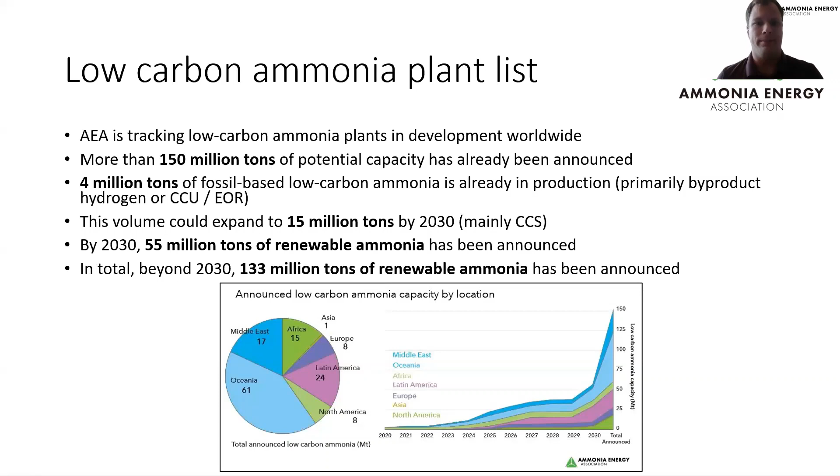Okay, well, thank you very much, Kevin. This presentation already looks quite interesting if you look at all the projects of green ammonia coming, and I think we're kind of proud that Fertiberia is one of the first companies that actually produce and plan to produce green ammonia in Puertollano.

I think Fertiberia is not the biggest company, but we are a reasonable sized company with 1,500, 1,600 employees working on the fertilizer business. And what's more important in this case, we have more than 40 years of experience in producing ammonia on the site. You see a lot of announcements of green ammonia projects, but it does help if you know what ammonia is about and how to make ammonia, and how ammonia is different than many other chemicals. Next slide.

We use ammonia to produce fertilizers, and fertilizers are an important factor in greenhouse gas emissions. We said we want to reduce it, and we're going to do it. That's the main reason Puertollano is the first site — together with Iberdrola, we managed in a short term to achieve full-scale production of green ammonia and green hydrogen, an important step in learning how to make green fertilizers work, including certification. If you're first, you have to develop all the new rules, and it's an important step toward fully decarbonized production.

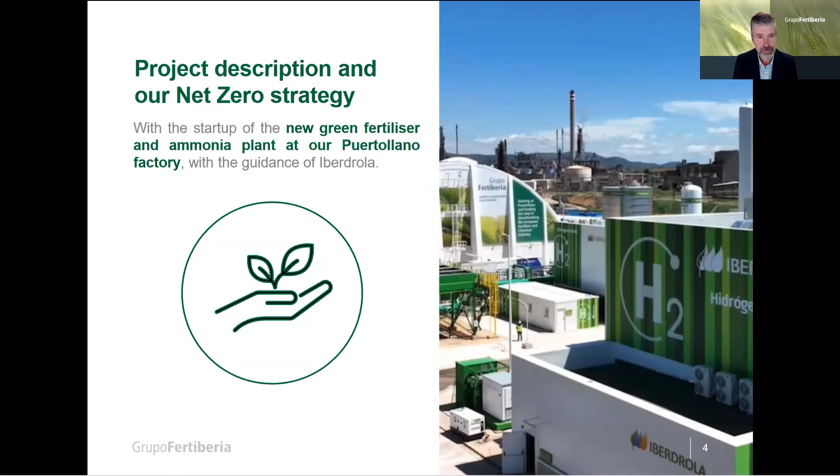The plant in Puertollano is what we call our kilometer zero plant. It's not about the future, not a project that's coming — it's actually running and producing hydrogen at the right place. It's connected to a solar field producing renewable power, and we're running a lot of tests now to produce hydrogen and feed it into our ammonia plant, a few hundred meters south. Iberdrola is our partner producing this hydrogen and who has installed the renewable assets.

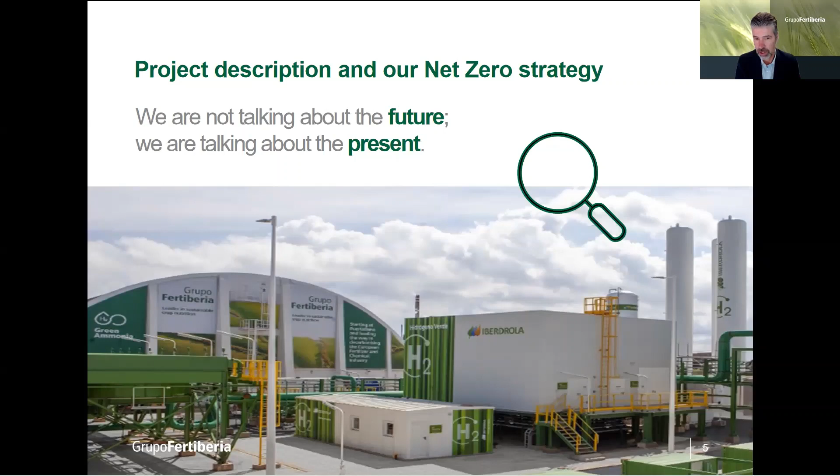This is the moment we can switch to a film we've built on site, which is a nice representation of how it actually looks and how it's being built up.

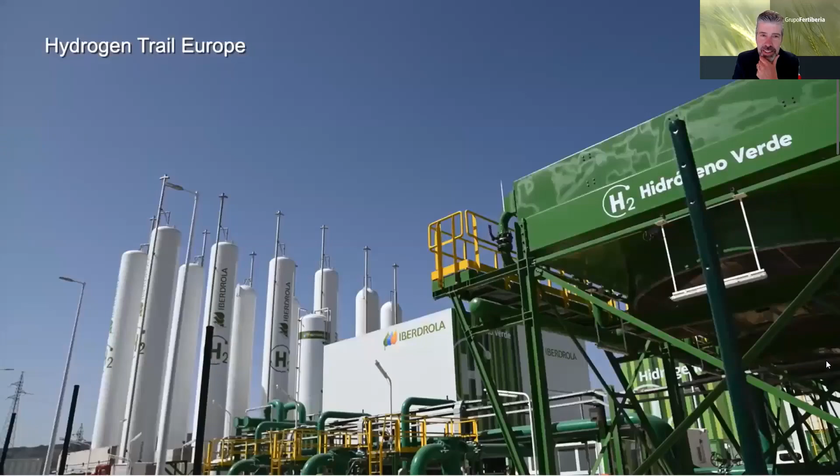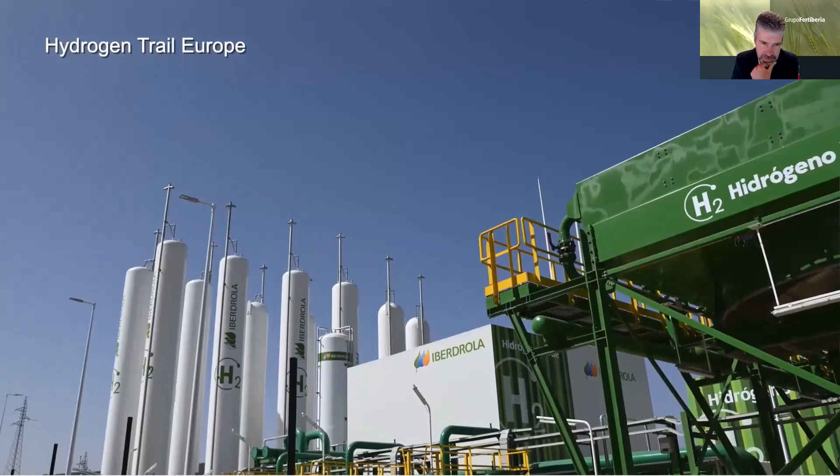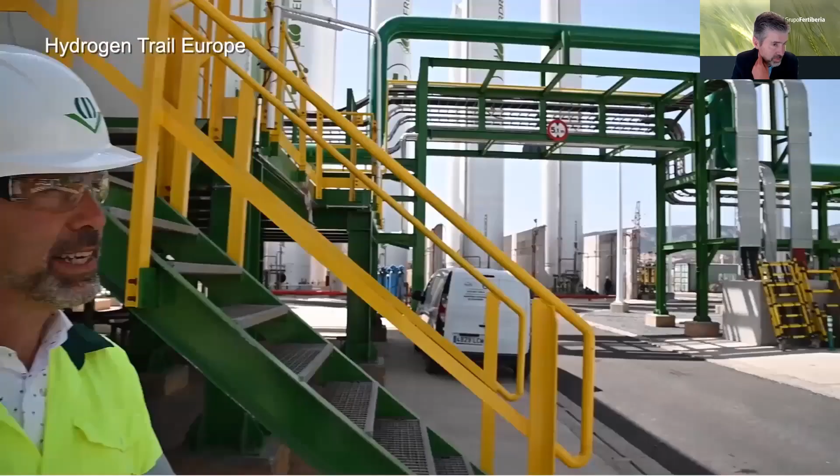We're here at the Puertollano site of Fertiberia, the first green ammonia production based on green hydrogen produced by Iberdrola on this site. What you see here is everything needed for a 20 megawatt hydrogen production. It starts with power coming in from the solar field, 8 kilometers away, feeding via cable to the rectifiers on the other side, then the power goes inside the electrolyzer building, where there are 16 units of 1.25 megawatt PEM electrolyzers.

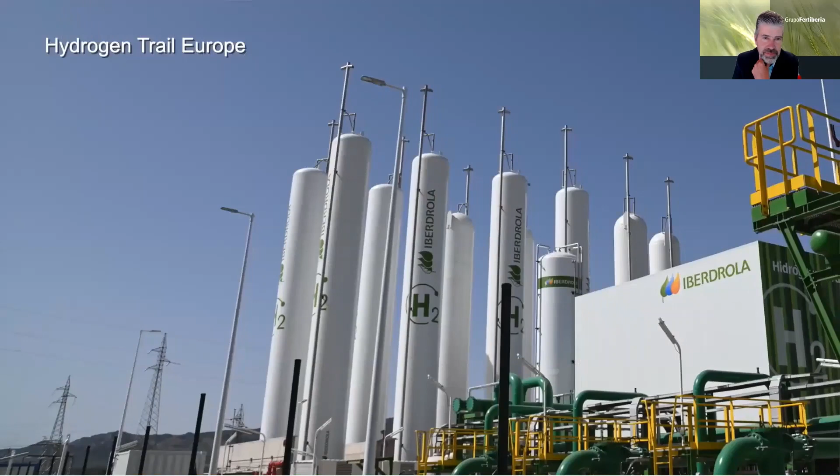Together they're 20 megawatts. This hydrogen goes via a compressor into the storage area, which contains 11 cigars that hold the hydrogen. We need quite some storage because we operate this hydrogen with an ammonia plant currently also run on natural gas — we combine both because we need a constant flow of hydrogen into the plant. Since the power comes from a solar plant, it's going to be dark at night, so we need a buffer storage, and this is quite an extensive storage to cover us through the night.

So of course 20 megawatts is a beginning, and we learn a lot from doing it here. For that you need constant hydrogen use, so you can only do that at a site where you already produce ammonia, and then you have two choices. We have good cooperation with Iberdrola at both sites where we produce ammonia — this is Puertollano, and Palos is the other in Spain. We started here because this gave the best principles, and also the solar field here was the earliest available.

At the moment we are standing next to the biggest green hydrogen electrolyzer in Europe — and it's also the first green ammonia production and green fertilizer production in the world. You think that's the future?

Yes, it's definitely green ammonia is the future. I think looking into the future, you will have dedicated green ammonia factories. This is a hybrid factory.

Next. So our company is a company of Norway. We have our headquarters in Oslo, and we are a leading hydrogen technology company specialized in two business units: electrolyzers, water electrolyzers, and hydrogen fuel stations.

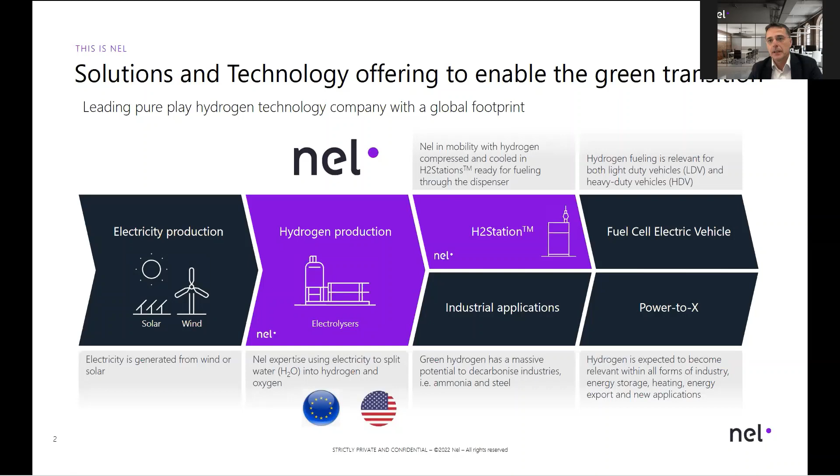We have two technologies, and in fact in our group we have two main factories. One factory in Norway for the alkaline electrolyzer technology, and also another important factory we have in the United States related to the PEM technology, proton exchange membrane technology of electrolyzers. In both technologies we are growing in production capacity, but also in new developments and new improvements in the designs and installations.

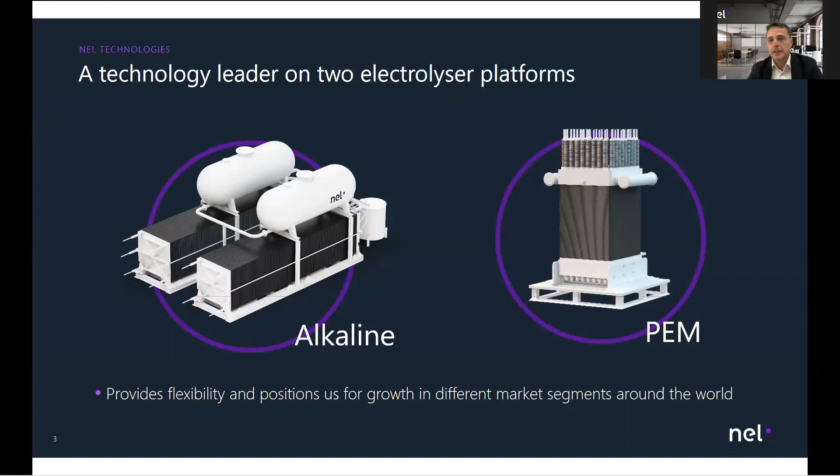Our company is special because in the same group we have the two main technologies of electrolyzers, and also we work in different ranges of production, from small electrolyzer systems for testing and industrial use, medium size that could go up to 20 megawatts, and also bigger, large scale size up to 100 and even hundreds of megawatts. The renewable market is moving in that direction, towards larger scales, taking advantage of the renewable feed. In our case, we are also being prepared to attend larger and larger projects. But having said that, we also maintain our product portfolio in all the different sizes of projects.

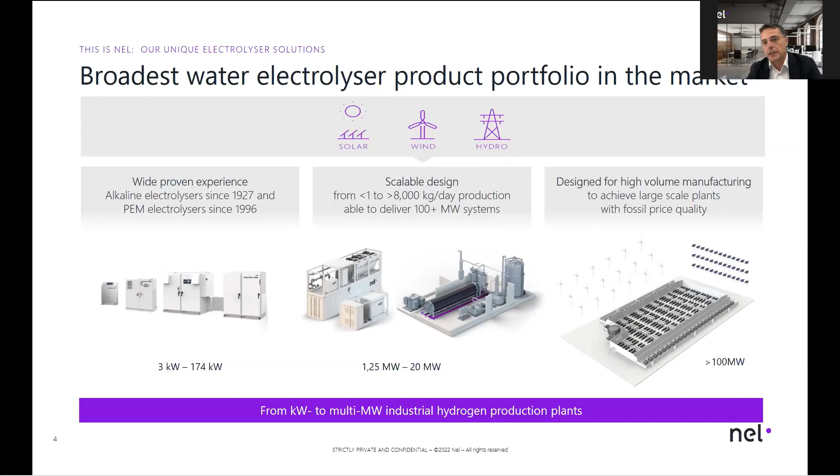I will explain in the next one how we look to the market, and also what applications and opportunities we see in this new green hydrogen market.

In fact, our company is a company that was established 90 years ago in Norway. So we joke that we are an old startup company, because in fact our company is old, but we are like a startup in a new phase because of how mature renewable energy is becoming, and how industrial applications and different sectors can be decarbonized. This is what is happening.

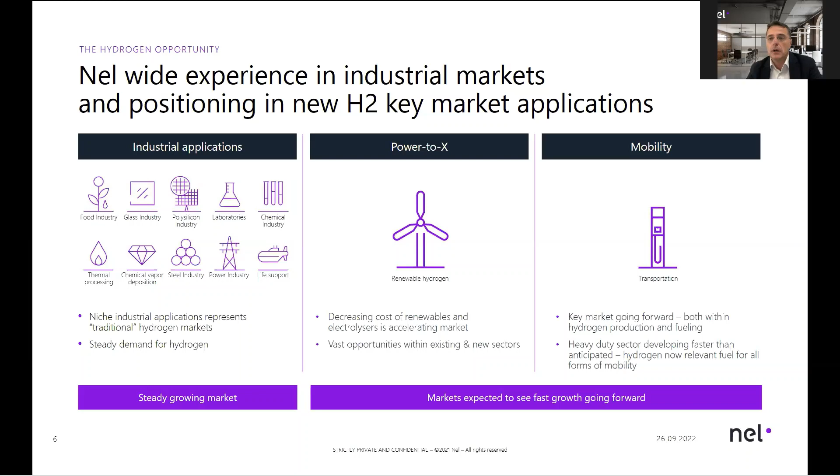We know the technology, but we need to increase the production and the scale, and we also have experience in different sectors, such as fertilizer, semiconductors, chemical industry, and the steel industry. So the sectors are there. The difference today and in the future is how renewable energy will be able to replace natural gas, and how hydrogen will be used as an energy carrier or as a raw material for industrial processes.

We need to improve different sectors and parameters, but the knowledge is there. We have experience in the chemical sector, semiconductors, and mining. Recently we are also obtaining orders for electrolyzers for the steel sector, to decarbonize it, and we have activity in Australia as well. So as you can see, our company is not new. We have this experience that is the base for our new growth.

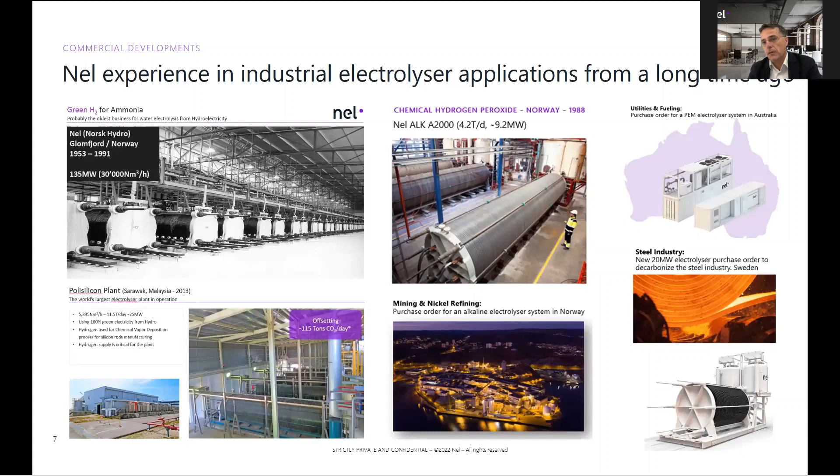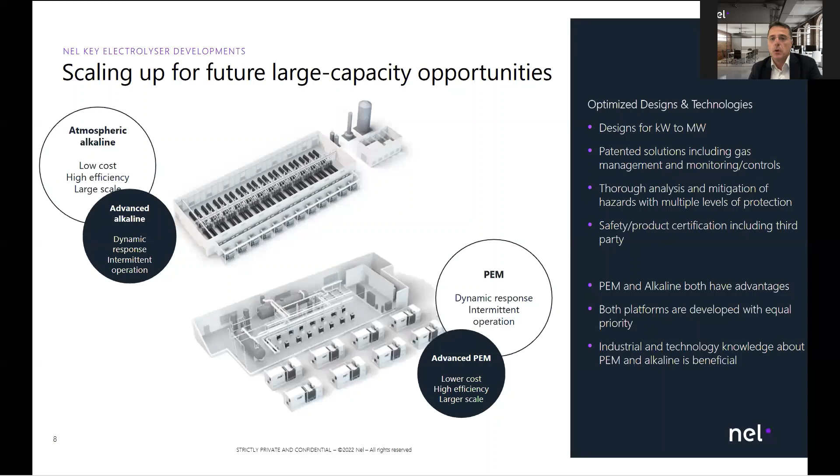What is happening today is that projects are moving to a larger scale for different industrial applications, including green ammonia. We are preparing our company for these large projects in both technologies, alkaline and PEM. We have research and development projects, and also standardization. What is important when you go to large scale is to standardize your solutions in order to reduce risk to clients and for installation on site. That is what we are developing, this industrialization. We are preparing our production facilities for this large scale, and that is currently our focus. We are growing as a company, incorporating more engineers and employees.

The green hydrogen market is moving so quickly, with support from the European Union and the United States administration. The needs and demand of the market are there, but the offer and the demand are not yet balanced. Companies like us don't yet have the capacity to attend all the projects that could come in the future. But our company Nel is in a leading position because we already have a fully automated production line of 500 megawatts per year. Because of the latest movements in the market and the contracts we have been awarded, that gives us the leverage and support to invest in more production capacity.

As you may understand, we cannot invest in bigger capacity if there is no support from clients or from real projects. We have to be cautious, but what we are doing is investing in production capacity at the same time that clients are committing to work with us. By 2024, we will have a second line of production installed, with a real automated production capacity of 1 gigawatt by 2024. But depending how the market evolves, even our plans are more ambitious. Our company will still be growing to accompany our clients and partners.

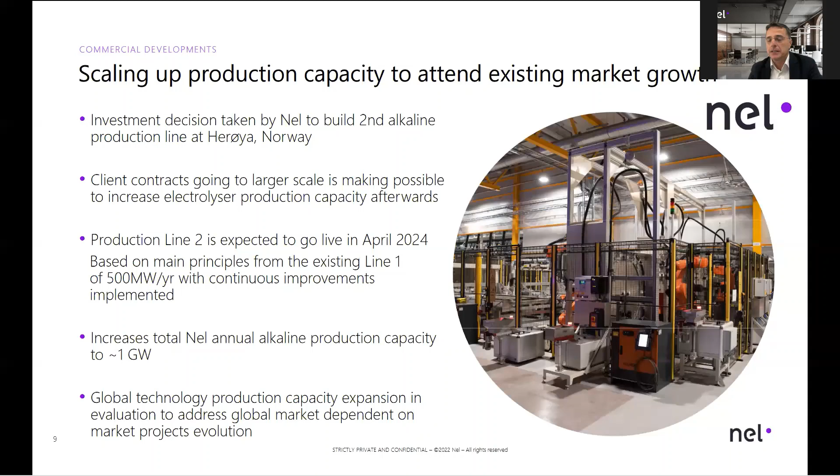Some examples of how the market is moving. I will talk now about the Skovgaard Energy project. This is recent, from some months ago, an interesting pilot project to demonstrate renewable energy fluctuation to produce green ammonia in the synthesis reactor that one company, Topsoe from Denmark, will install after our electrolyzer unit. So it will be a complete demonstration line of renewable green electrolyzers and green ammonia production, with a lot of learnings that later will go to industrial large scale. This is happening now.

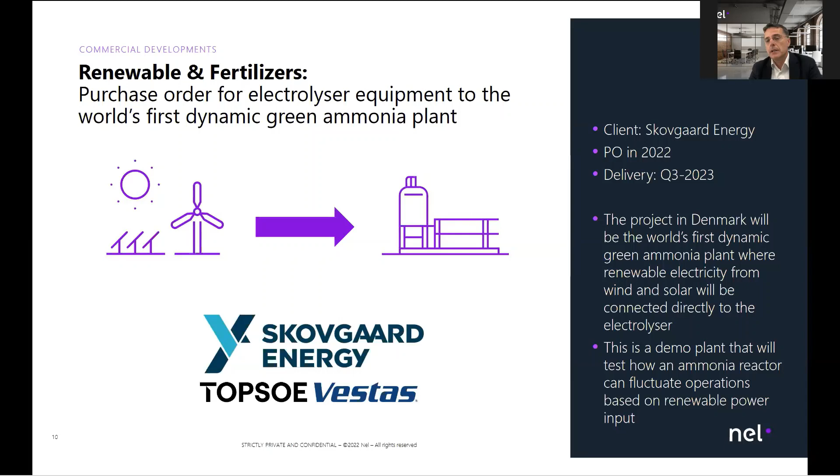And of course, in the next one, this is the Puertollano project of Iberdrola.

Iberdrola is an important company, one of the leading renewable energy companies in the world, one of the biggest and most important in this sector. They were pioneers, in the front line of the green energy market because they started many decades ago with wind renewable energy, then entered photovoltaic solar projects. Now this important company, client and partner, Iberdrola, and we have the same vision to decarbonize society, to decarbonize the industry, and to implement and help the green transition in our society and industries.

So we are accompanying Iberdrola in the project of Puertollano. It was an honor for us, for Nel, to be considered and selected by Iberdrola for this project.

Iberdrola selected the PEM technology in this case. As I mentioned, we have different options of technologies, alkaline and PEM, and depending on the project specifics, it was decided to use PEM technology. This project is still in tuning, in trials and in operation improvement. It's a complex project, and I can explain how the system works.

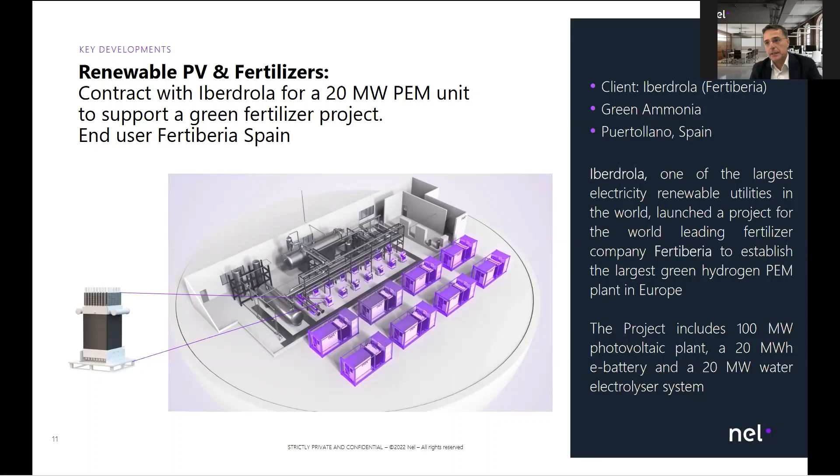But let me explain in the next one, and this is just to finish, so you can see more information about our company on our webpage. Now we can see a short video of how our technology looks like.

Thank you, Imanol. And the video will be starting soon, I guess.

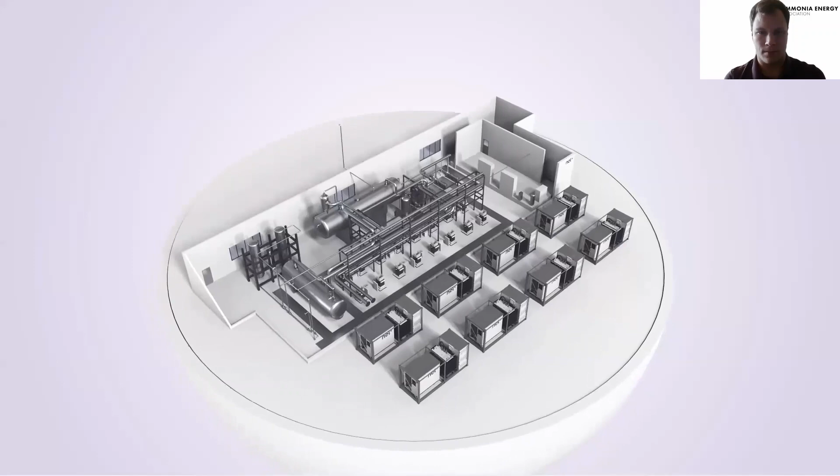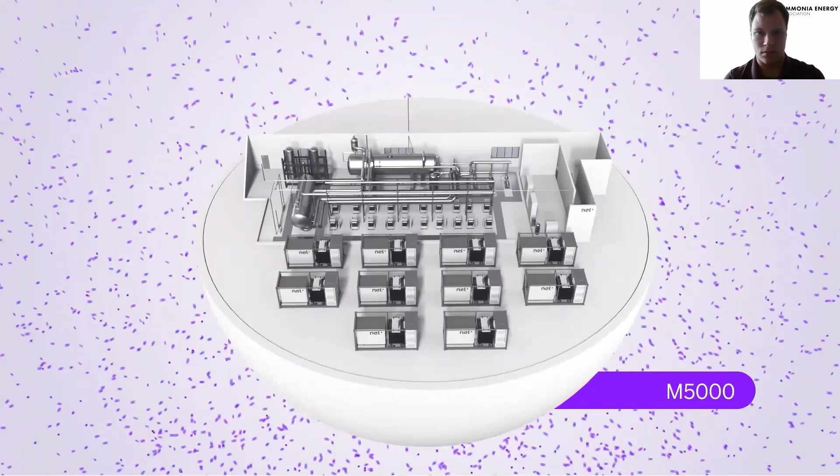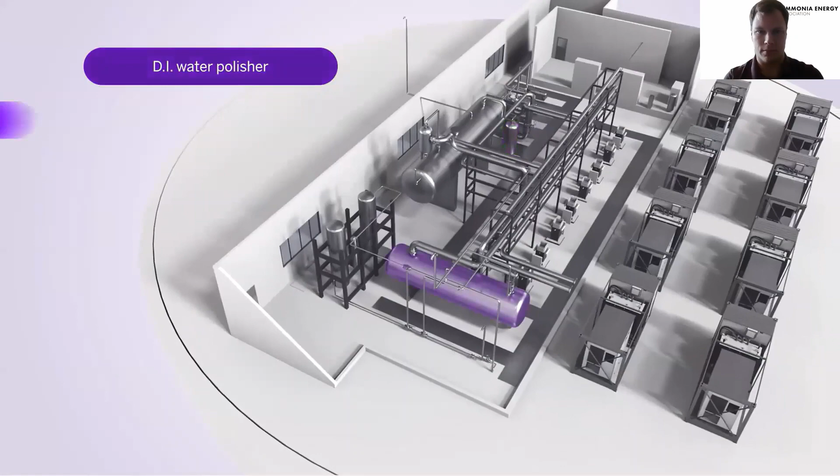Nel, the leader in on-site hydrogen generation, is taking our M-series PEM electrolyzers to the next level for high-volume hydrogen customers. Our M-series electrolyzers are based on standard and proven cell stack and power supply modules, aggregated into a compact and cost-effective balance of plant. Ranging from the M2000 producing over 4 metric tons per day of hydrogen to the M5000 producing over 10 metric tons per day, the M-series plant design provides modularity without excessive redundancy. Oxygen phase separator, heat exchanger, water circulation pumps, electrolysis cell stacks, DI water polisher, hydrogen phase separator, hydrogen dryer, and it all comes with the proven attributes of Nel's PEM electrolyzer technology, including low maintenance, safety by design, and decades of reliability.

Thank you for that, and thank you, Imanol, for the very nice presentation. The most interesting thing is that we move from these nice videos to an actual plant that is running. I think the biggest takeaway here is that there's actually a plant running on these units, and they exist. That's really great.

I wanted to go for our first question to Marc. What were actually the key drivers for this project to be first of a kind? There's probably a lot of risk involved in being first of a kind, so what were the key drivers? Is it the off-takers, the government, or mainly internal wishes?

Well, it's important to learn, to start, and to work away the issues once you're doing it, because you can think big, but it's not so easy to work big.

The Puertollano site was an excellent site because of its solar capacity and the fact that we already have the capability to absorb the hydrogen that's being produced. We're not dependent on a hydrogen market that needs to develop for transport, so we could actually use the hydrogen at scale and start working on producing the green ammonia.